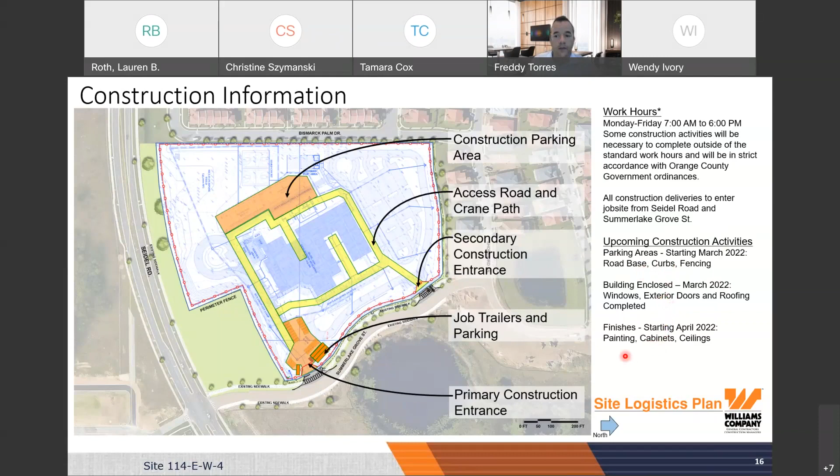Some upcoming construction activities include the parking areas, which will include all the road base, the concrete curbs, and all the permanent perimeter fencing being done this March, as well as the building being fully enclosed, all the windows, the roofing completed, and all the exterior doors. That'll allow us to transition into April for the air conditioning system startup and get our finishes, which include painting, cabinets, and ceilings constructed as well.

I'm going to go into a batch of aerial photos starting at the beginning of the project. Here's one from July, where you can see the area was cleared by this time. All the perimeter fencing and best management practices to control debris and storm runoff off the site were installed, and our construction entrance was established in preparation for our construction work area.

By August, we had established all the construction roads around the site to ease access and get going on all the foundations for the project.

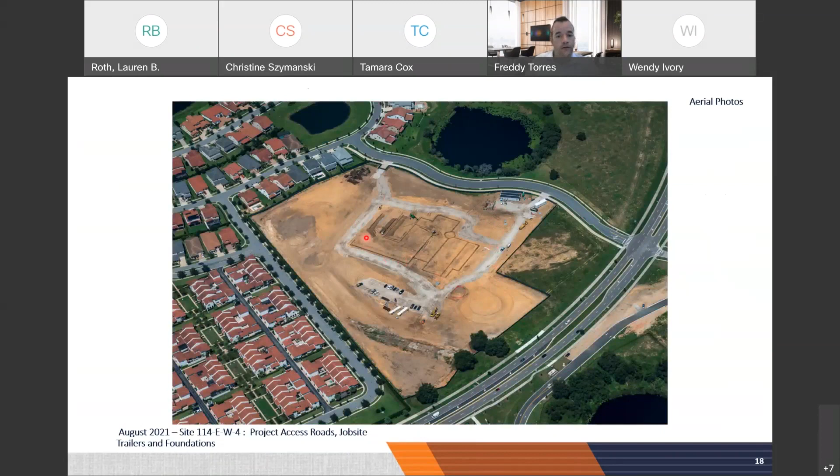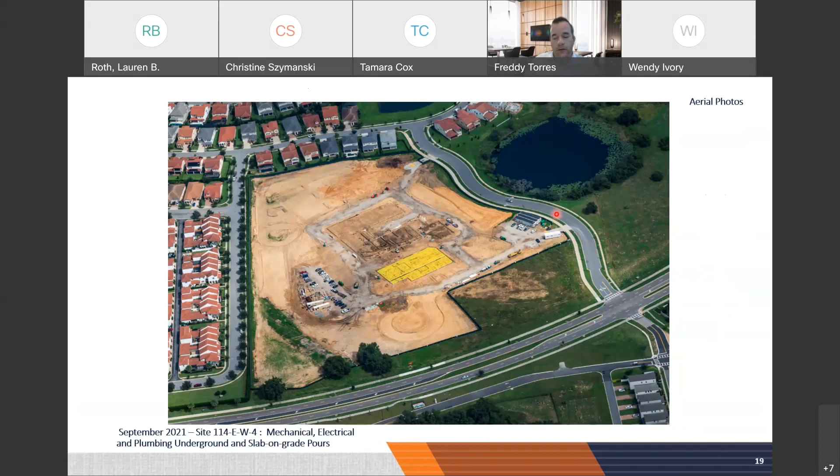By September, you can see here in yellow the foundation waterproofing being installed in preparation to pour the concrete for the slab on grade, which is basically the floor of the building. Our laydown area was now established with all the major trades, and we had also established both entrances, allowing ease of access for all the trucks to come in on one side and exit the other, eliminating the need to back up any trucks on the project.

Moving forward, by October, we had started forming all the tilt panels, which you can see here on the slab itself for the building. Once those are formed and poured in place, they all end up being the walls for the building. You'll see here quickly from October to November just how much work goes into place once those walls are poured down on the ground.

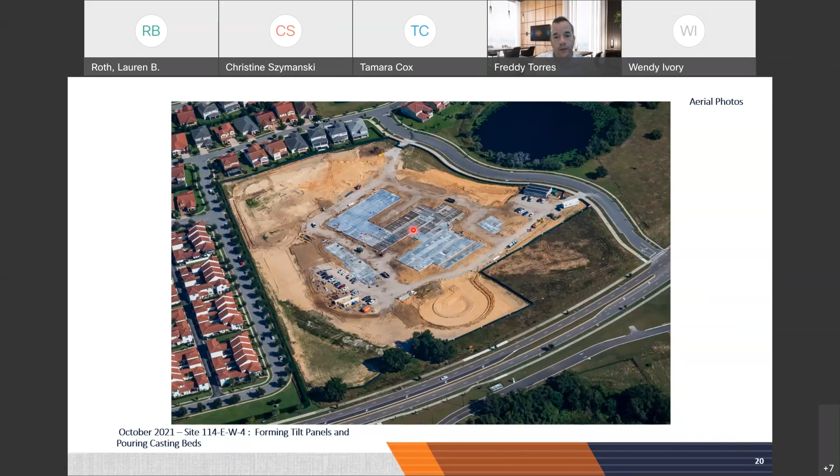In just one month, the actual walls were all tilted up in approximately two weeks, and the structural steel then started arriving, tying all those walls together for the project throughout.

Just to give a brief understanding, here's the two-story classroom building with the admin and music suite in the middle of the building, and the dining and multi-purpose rooms on the south side.

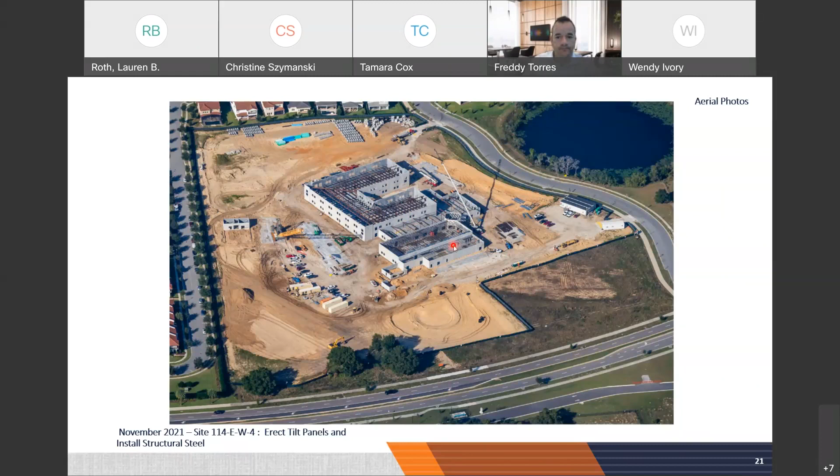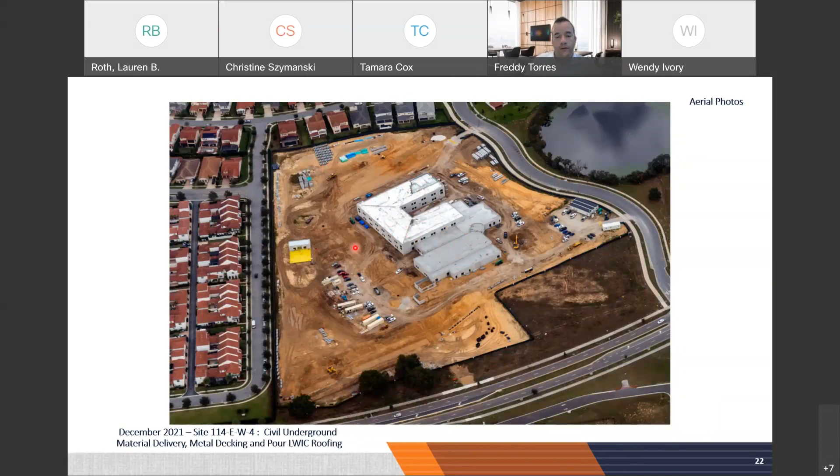By December, we had started the roofing. This is the lightweight concrete you see here on the classroom side, that's the installation of the roofing going into place. At this time, a lot of the grading around the site started going into place. Here on the north side, you can see a lot of the storm structures, which carry away all the water on the project underground, being set and ready to be installed.

By January, the roof had been completely sealed. This allowed us underneath, before the membrane was installed, to start with the framing and a lot of the rough electrical, plumbing, and fire protection work underneath, as well as the fireproofing, with all the structural steel on the project coated in a fireproofing material for fire safety.

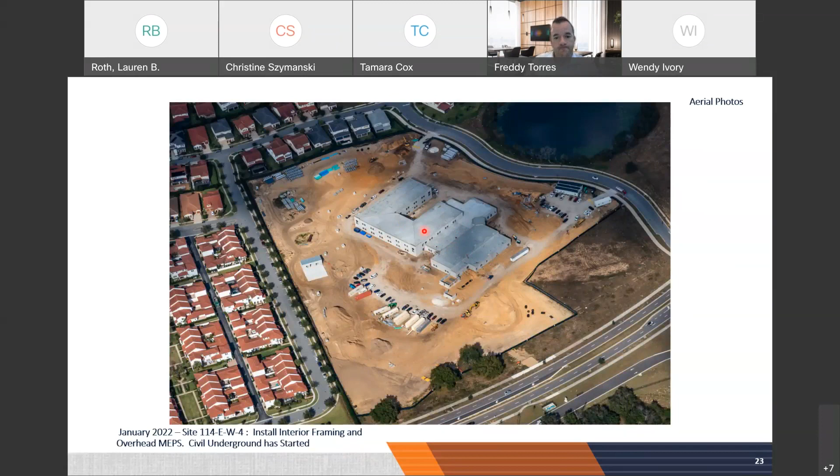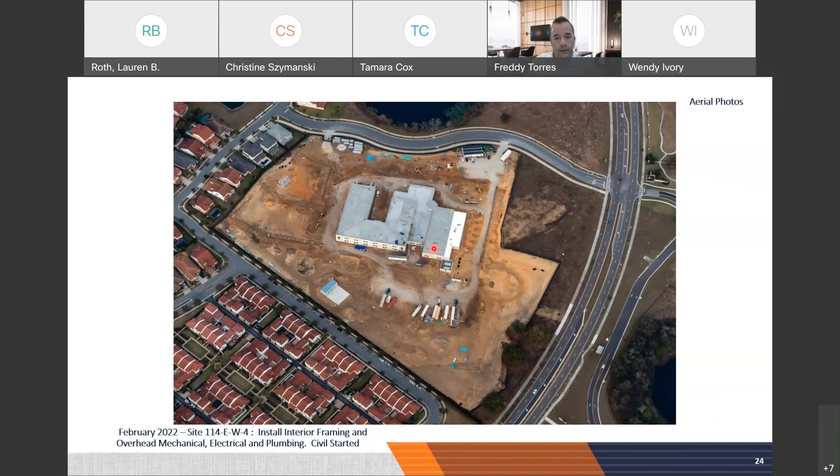At this point now, here in March 1st, we've got about 80 to 85% of the roofing completed, and they will be done probably by the end of the week, with just some detailing work to be completed. That'll allow us to proceed on the interiors with the drywall and preparation for painting, and moving forward with the finishes.

So now, just to mirror some of the aerials, I'm going to show some of the ground photos during construction from back in August through October, some of the grading that took place on the project, and a lot of the underground work needed for electric, water, and sanitary, all being installed and stubbed up through the slabs before we pour the concrete on the floors.

On the bottom left, it's some of the tilt panels, those walls I mentioned, and you see on some of the aerials being formed with all the structural steel within them and being ready to be poured in. As I mentioned, all the walls were erected within roughly two weeks.

On the bottom right, it's just a nighttime picture of some of the pours. The majority of all our pours are done early in the morning. With the Florida weather, it's conducive to the best quality for the concrete, as well as eliminating any back and forth traffic with the concrete trucks that need to go in and out of the project site.

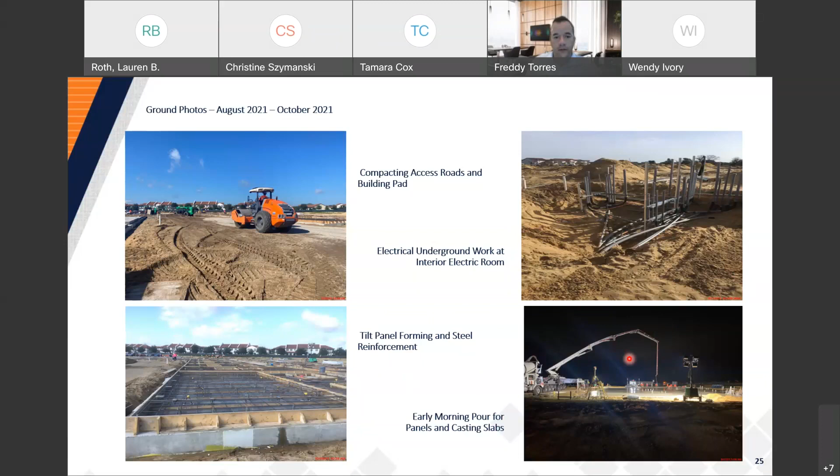Here's another nighttime picture with the panel actually being poured on the ground. And as I mentioned, a large crane then comes in and erects all those walls into place with the structural steel, shown here on the bottom left, tying all those walls together. Finally, the roof joists in preparation for the deck for the roof being installed here in the bottom right picture.

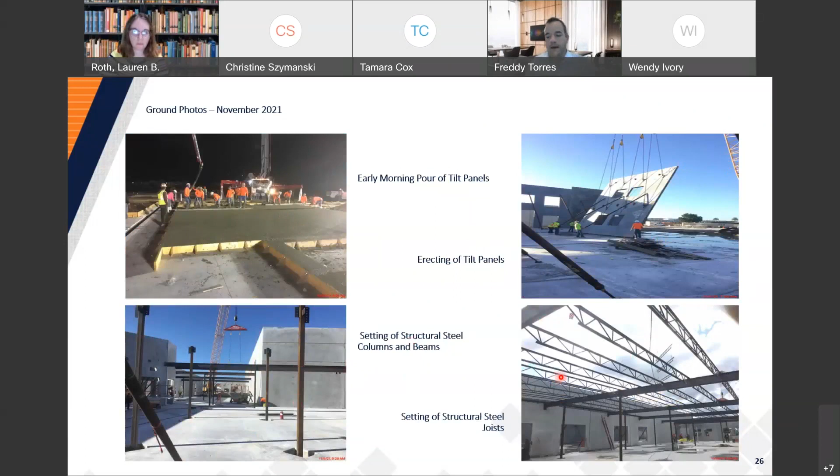Some more details of the pictures as we slowly close in the roof. This section here, we'd actually poured the second floor deck at this point. Here's just a detailed picture on the bottom left of the covered PE area, foundation, and the waterproofing that goes into place there with all the reinforcement prior to the concrete being poured. And this is a picture on the bottom right of that fireproofing material that I mentioned that gets applied to all the structural steel throughout the building.

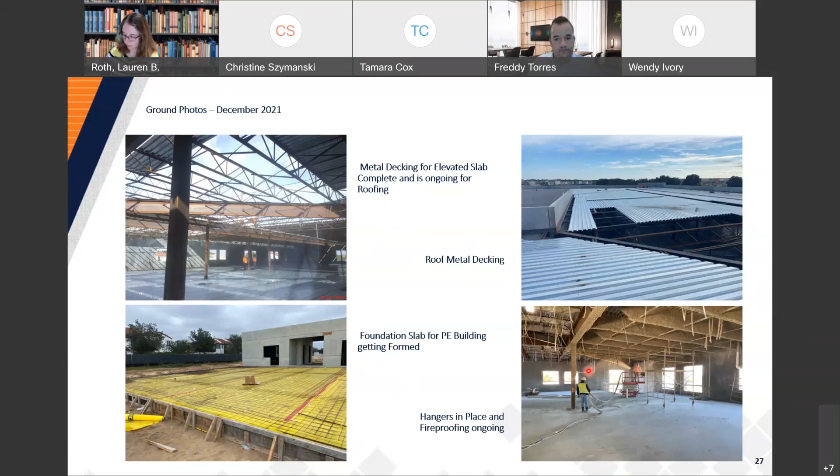Some detailed pictures of the storm structures and piping that all go underground in preparation for us to move forward with the parking areas. On the bottom left, just a picture of the Duke Energy transformer being set into place. We already do have an energized transformer to the building as we wrap up some of the last electric rooms.

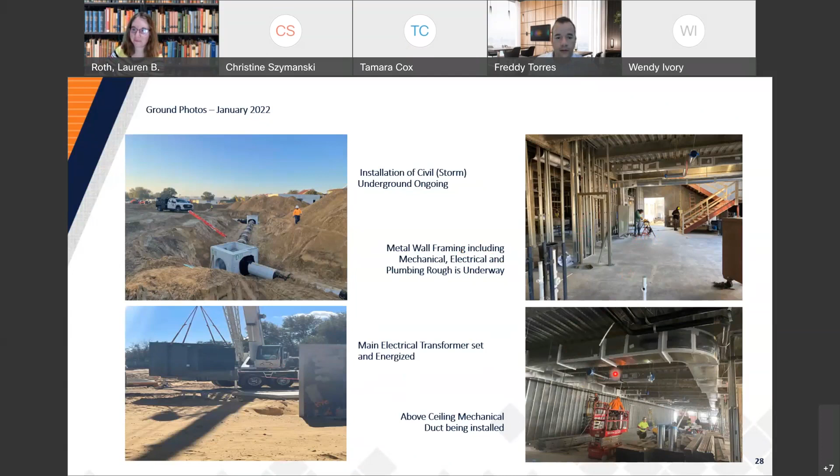And push forward to get permanent power set to the building. On the right, just a couple pictures of that rough work that I mentioned, with the metal framing being placed, some door frames, as well as a lot of the mechanical, electrical, and plumbing all being installed above ceiling while work proceeds in preparation for finishes. So that is just where we're at today. We're excited here in the next few months to wrap up the project and turn it over to OCPS and just have another successful project.

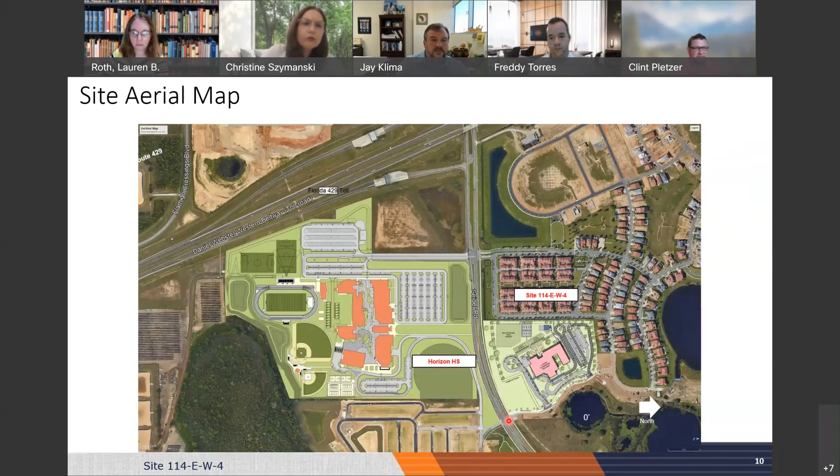Okay Clint, will that get looked at again once the school opens as well? Citizens are always welcome to petition Orange County traffic engineering if they see a traffic issue, and it would be up to their process to look at that. We have looked at that pretty extensively already between OCPS and Orange County Traffic. We did three different signal warrant studies, and only one warranted.

Can you explain what that means, warranted? It's based on the MUTCD, the Manual on Uniform Traffic Control Devices, a national publication, and they set out a series of steps you have to meet to recommend putting in a new traffic signal. You go through those steps and see: does it warrant, is there enough traffic, is there a safety issue? You put all those together and meet this nationally recognized guideline. We put those three locations through those tests, and the one that did warrant was Seidel and Summer Lake Groves.

Okay, Freddie, could you go back to the slide that shows both campuses? There was a clarification that Watermark is across Panther Lake from the elementary school. So as Christine was saying, I guess that would be kind of the top right. And is that Panther Lake right there?

Hopefully I'm getting that right. But it does not look like there's a direct shortcut from there or anything like that.

Okay, a couple more school related questions. Freddie, for one of them, we could definitely use the site plan. If you could show where the covered PE pavilion is. Yes, so if you can see it circled there in red, that's the covered PE area. It does have one—there's a covered walkway from the back of the building to that area.

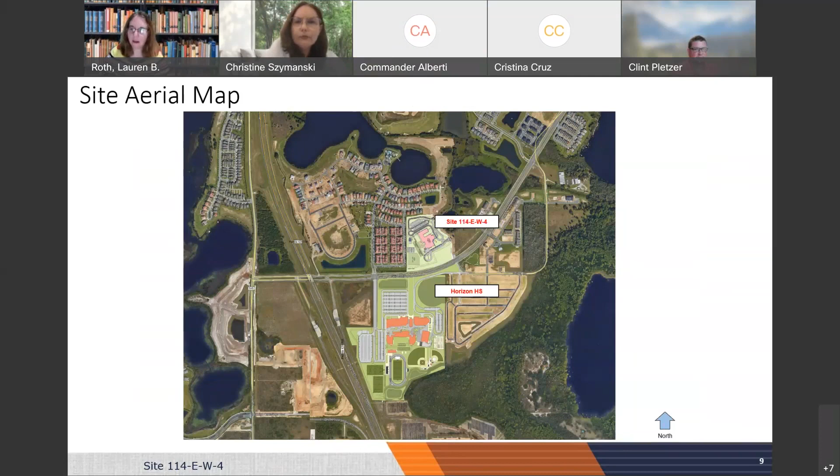At the intersection, I understand there'll be a traffic light later on. Will there be crosswalks going across the road later on, or how does that work? Not there, but on the other side, going across. Yep, right where the highlight is, that's where the crosswalk will be across Seidel. There'll be one crosswalk so we can funnel all the kids to one spot and have one crossing guard there, on that leg right there.

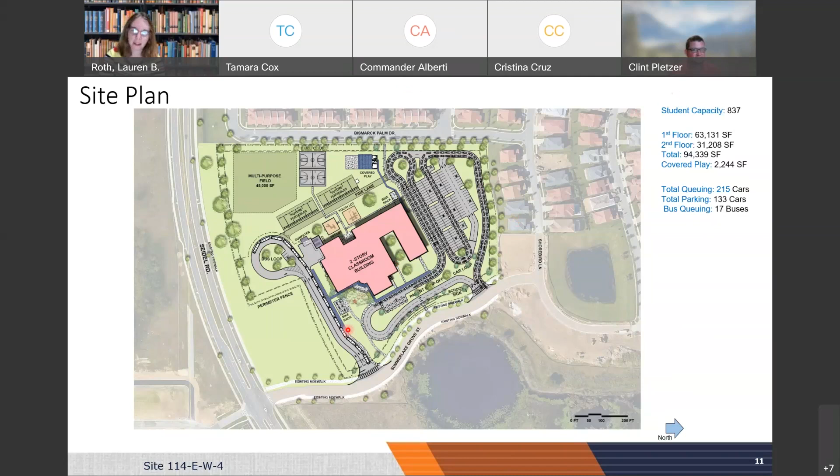Apologies, sorry about that. The next time we'll see you is the sneak peek. So our next event is going to be the sneak peek, that'll happen within two weeks of the school's opening date, sometimes tied in as the Thursday or Friday before school starts. So watch out for information on that, and that'll be your opportunity to come and walk around the school before it officially opens, presuming COVID allows at the time.